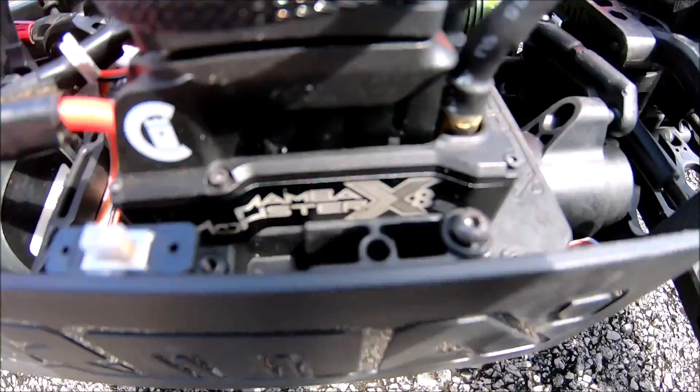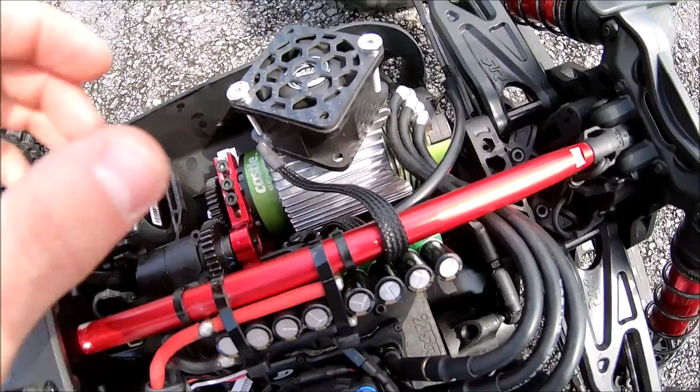So pretty much what we have here from NTF, we have a new Mamba Monster X 8S fan, and it's pretty cool. I believe it is 2S rated, but we're gonna run it on 3S. As you see, we have our little 3S harness attached to a little 3S battery, and same thing with the Castle 2028 heatsink and fan combo. So we're gonna see what we can do.

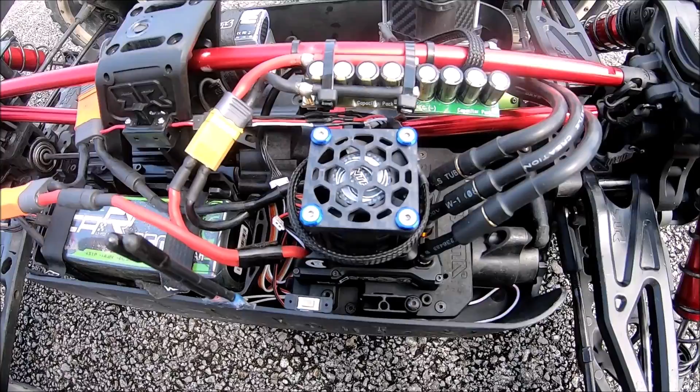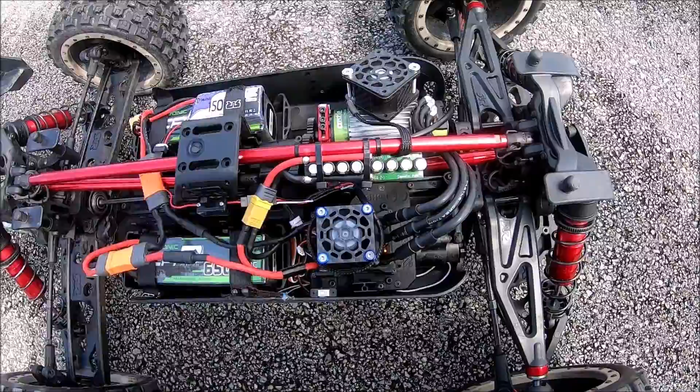Now real quick, what's pretty cool about this direct replacement fan for the Mamba Monster X 8S is we're gonna run it on 3S right now. I really like how it actually grows in RPM. It starts off pretty slow, and then just proceeds to haul some ass. But that's pretty funny. Now with both plugged in, that one just absolutely screams. Let's see what we can do.

The center diff is still slipping a little bit. Woo! That is crazy. Yeah, I hear the ESC cutting out a little bit from the amp draw.

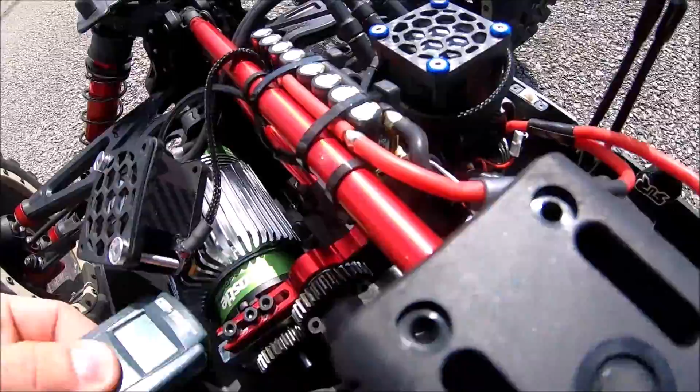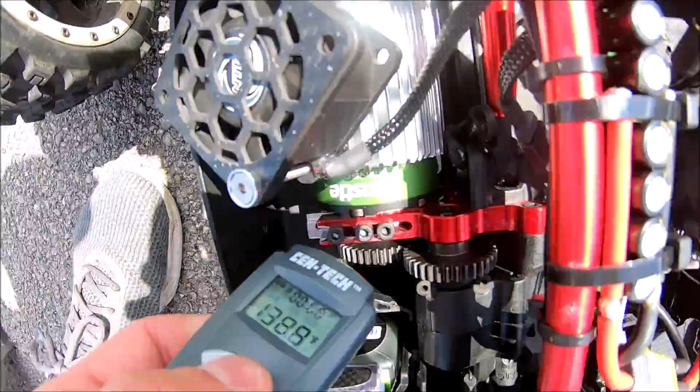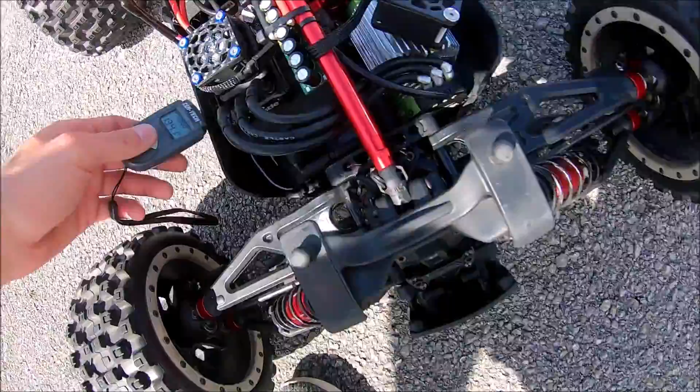All right, so let's see our temperatures. Let's probably turn it off. It's not that bad, 140, yeah, the motor is kind of hot. I do have the sensor wire temperature cutoff to 180, so we'll be safe up to that. 144, almost 145, let's hope we broke some heat with this thing. There you go, 134. I'm finally happy to see that this ESC doesn't heat up.

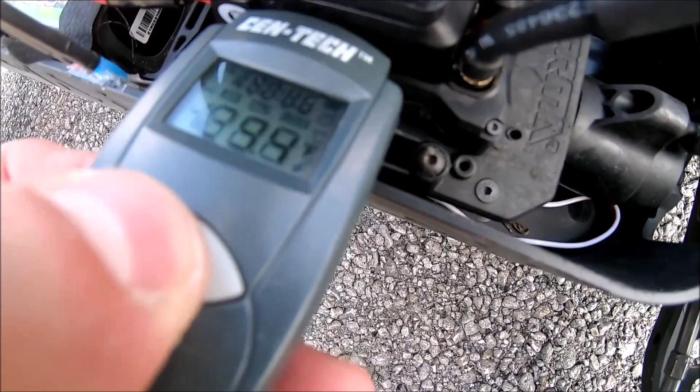Let's try to get on the heat sinks. 132, 33. All right, just pull everything off.

So with the setup that we have, it's a monstrous setup, and yes, we are in overdrive. If you guys were wondering the gearing, we're running 39 on the pinion and 34 on the spur. So we're going to be drawing a lot of amps. I actually want to see the data log for this and see how many amps we're drawing.

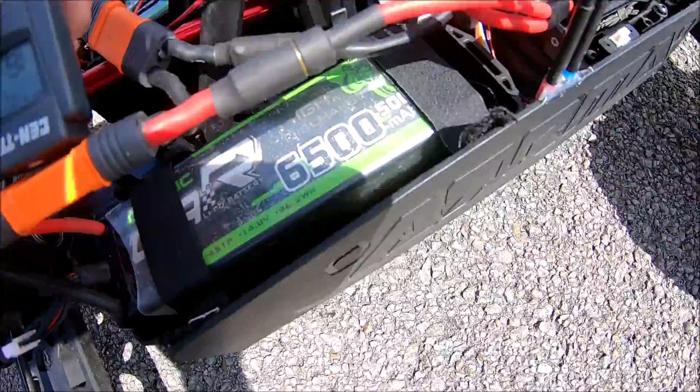Now I do feel the connectors, they are actually kind of warm. So pretty much we're trying to suck out more power than we could really dish out with these batteries. So we're going to have to up the connectors and up the batteries. There we go, that's what I want to see. Right there, that's our hinder. That's why this ESC keeps cutting off at a certain speed. So 56 miles an hour, that is nowhere near of what the speed could have been.

So 154, 155, let's see this one. 160, wow, that is actually pretty hot. So yeah, of course, we're actually running an 8mm bullet connector because this is also the ESC for my Limitless. Again, I only have one Mamba Monster X8S, so what I'm gonna have to do is actually adapt these to 8mm bullets too.

And hopefully, fingers crossed, there's gonna be a lot less heat, more giddy up, and less hesitation. We're drawing a lot of amps, and apparently it's too much for these connectors to handle. You know, you could only draw so many amps out of them. Plus we have 12 gauge wire with the batteries, we might have to up it to 10 gauge, or just get a better battery in general.

You know, these batteries are great, but this kind of setup is immaculate, you know? So these fans, they've helped out as much as they possibly could, but there's no defeating the amount of amp draw from this kind of setup, you know?

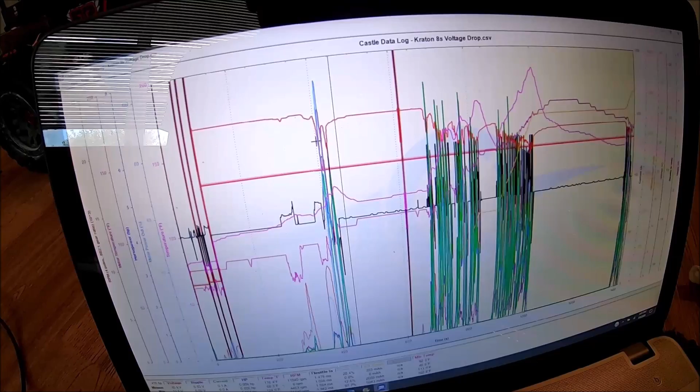So as you guys can see, this is our Kraton 8S data log out from the road. And this 56 mile an hour speed run, I still have batteries, so I accidentally left that on. It's gonna be this first spike, as you can see my mouse. Now what I'm gonna do, I'm going to hover over it.

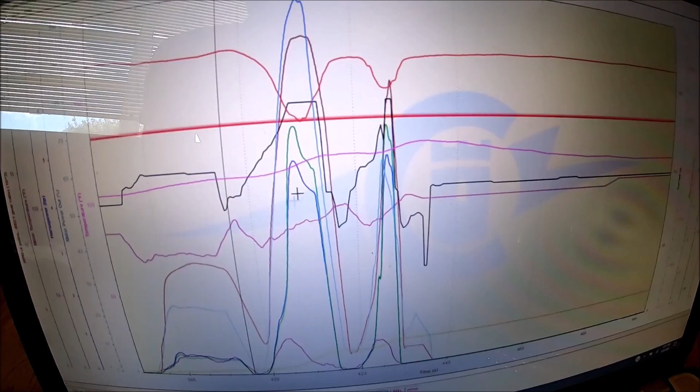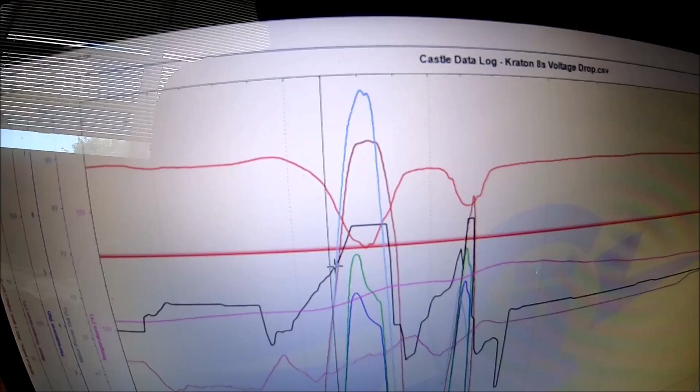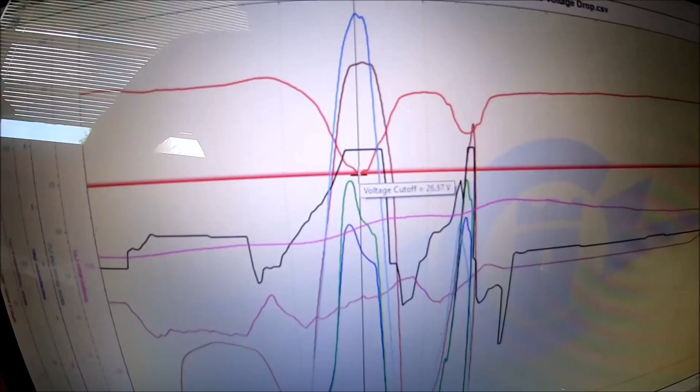Now as you can see, this big red line, that is our voltage cutoff. So this skinny red line, that's our live data regarding voltage. So of course, as we went up in throttle, this black line is our throttle position. We got to full throttle at about here. Now as you could see, when the voltage dropped, it triggered the low voltage cutoff at about 26.5 volts. That would be voltage cutoff at 3.3 or 3.2, I believe, for an 8S voltage.

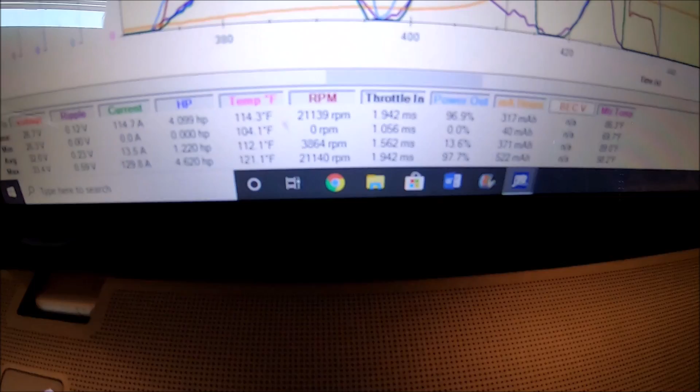Now as you can see, temperature went up, everything went up, voltage cut off. So 56 miles an hour, that's nowhere near the speed that we could have got. Obviously we need batteries that can support it. We were only experiencing about 21,000 RPM until it cut off. We should see about 25, I would say.

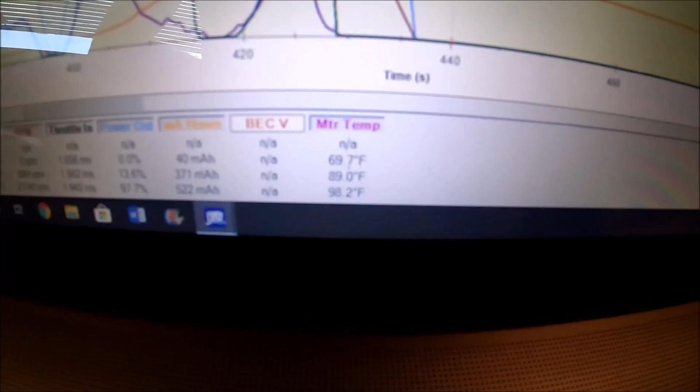So yeah, here's our stats, I'm gonna have our main stats right here. And at this run, the motor was only about 98, so that seems pretty legit from what we data logged, I mean temperature checked out there. So it's pretty legit, so I actually see why we were hindering.

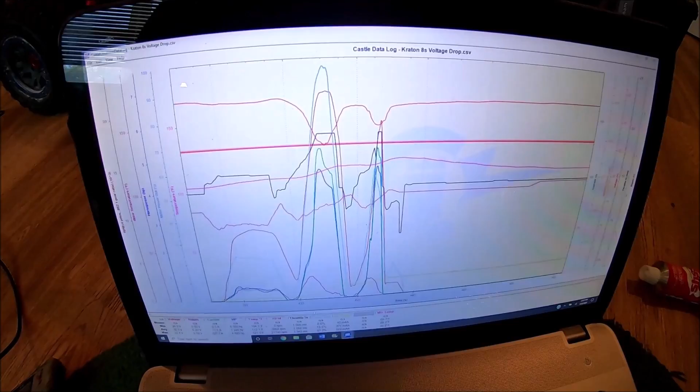So right now we don't really have a battery that can handle that kind of a setup with the 2028 in overdrive. So we're gonna have to gear back down a little bit, which is completely all right.

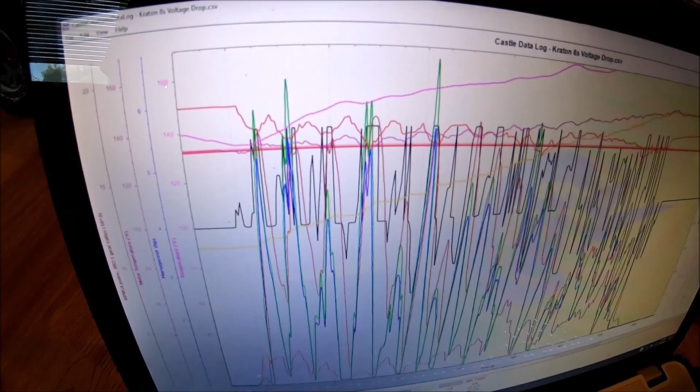And if you guys remember when I was trying to punch it, just trying to bash around with it, as you can see, that purple line, that's our temperature going up. So we're still safe on that, but again, that red bar, that's our voltage drop. And if you could see this red line, every single time I punched it, it gets closer and closer. There, right there, it triggered voltage cutoff, went up, triggered again, bashing around a little, triggered, oh, that's actually not good at all. It went under it and triggered. So then I just decided to cut it off right there.

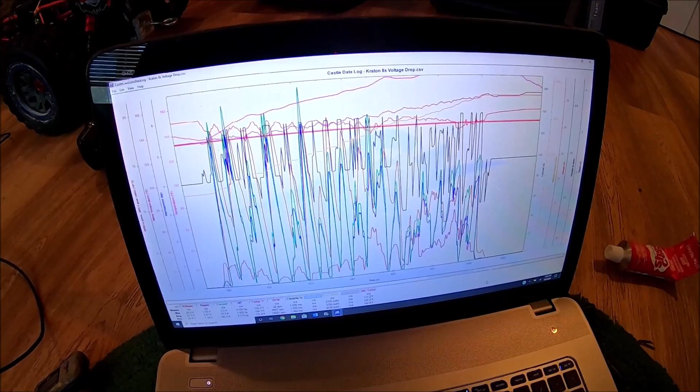So definitely make sure you guys have a battery that could handle what kind of setup that you desire to put in. Make sure your solder joints are good, because the connectors were about 150, 160 degrees. I already knew that there was a hinder right there, so I decided to pull the plug, literally.